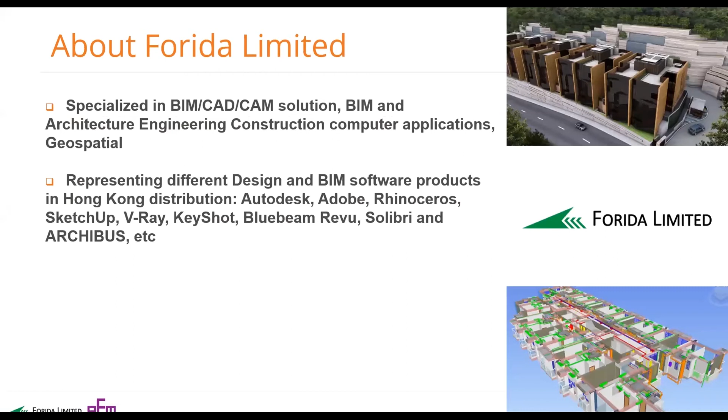And these are the products we carry. We have over 20 products. Feel free to let us know if you want more information on any of it.

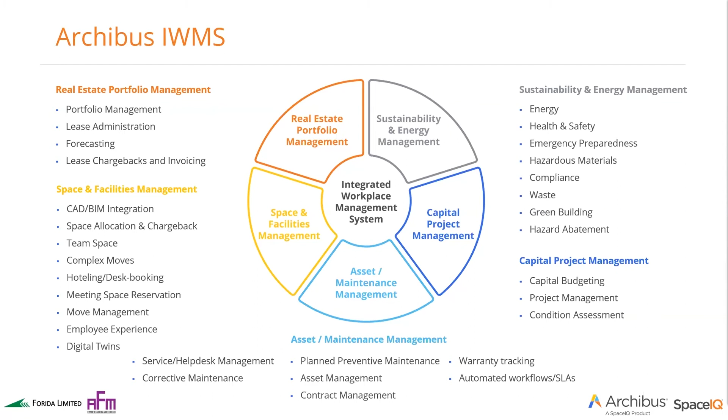So with that in mind, how can you stay up to date? You can use Archibus as a single source of truth. So it's one system that can virtually integrate any of your corporate systems, as you see, like any finance, HR, IT, whatever provider. You can connect and get information that comes from IoT sensors for occupancy, maintenance, whatever you need.

You can get information that comes from your CAD drawings, from your BIM models, information that is leveraged by maps with integration with GIS, Esri and Google, and even getting all your spreadsheets that transfer in and out as you need. It's a straightforward deployment from data entry to business outcomes. It's an open platform with a set of APIs and connectors to integrate with any platform, whether it's a software or a sensor. That is Archibus, the single source of truth.

So far, we have seen that we are with you with a global force all over the world and locally in your region. We have more than 1,000 implementations and clients that have been with us for many years, some for more than 15 years. So it's the right choice, and they keep on using it.

They selected that Archibus suite of products and implemented it module by module, and they keep growing and adding value because of that multitude of capabilities that we have. And these clients use Archibus as a system that centralizes their workplace and facilities data into a system, making their life easier and easier in terms of taking decisions and getting the processes done.

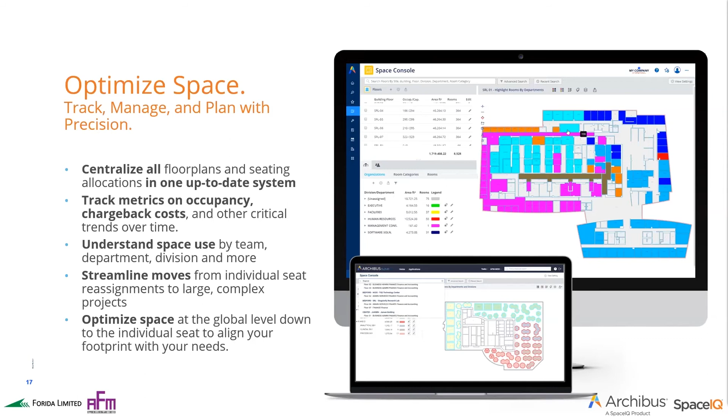In terms of maintenance, get an enhanced response from the field team, because we have a fantastic mobile app for service professionals. With that, you can get your work being requested, as we saw, by the end user, but then being managed on a console for maintenance or on the field service app. And you can track whatever KPIs and outcomes.

And you can, using a planner, reduce the maintenance by emergency or by on-demand. So you can easily get the preventive maintenance planned and implemented in the organization. And with that, standardize any best practices that you need in terms of facilities operations, and avoid any break or replacement of assets that are really costly for our organizations. You can do that with Archibus.

Let's look into the assets. You can get the life cycle optimized for these assets so that they last longer and you can get a better return on your investment. So you can prioritize those assets that are high value because you integrate with the maintenance strategy. You avoid the replacements. You reduce the assets that are underused.

Sometimes we have assets that are either in warehouses or that are not used as much, but because we can build this twin model, this twin approach, to say every information that I have physically, I can have a twin in the digital world. So I have this twin model with Archibus. I can easily detect what assets are not being used, because all the information is available here.

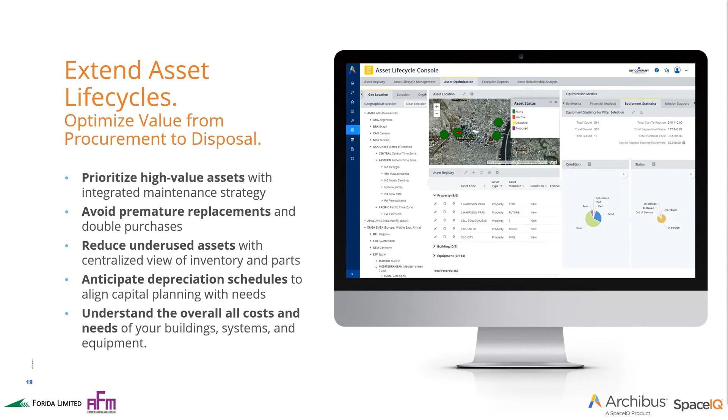And we can get the schedules in order in terms of depreciation, and we can easily understand the condition, the status, and the overall costs and the impact this has on my organization in terms of the life cycle of my assets. The last but not least is how to mitigate risks.

Not only can you deal with health and safety with Archibus, you can be prepared for emergencies, you can deal with hazardous materials and wastes, you can ensure that you are compliant with any legal or standard important for your business, for your day-to-day life in terms of your business.

So with this in mind, we are going now to do a quick Archibus demo. And if you see something that might be interesting to you, please consider that you can request from our partner a more in-depth demo to cover your specific needs.

You will see Archibus in the following layers. So we will see first the front-end interface, the Archibus Workplace for the workplace user. Then we'll see the back-end interface with the home pages, the console approach, and the reporting. If everything is okay, let's dive into the product.

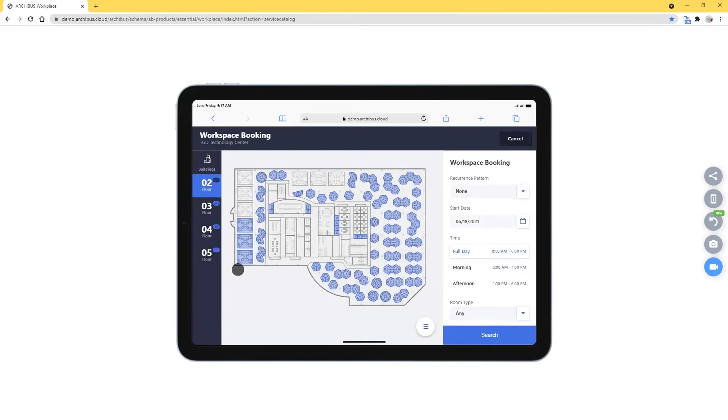So we can also book a workspace. Booking a workspace is something that is really important these days. We can safely book a meeting space, but then I also need to book a space because I'm going to work that day in the office. Right now, with the hybrid approach, Archibus easily lets us say, book the meeting, but now I want to book a work spot to work.

So I can just click on the work spot, click on book. I can book for myself or for another person, for example, a visitor, etc. I can just click for myself and click on book. And by clicking that, it's successfully booked.

So now I go to main. I can see here my reservations, my workspace reservations. When I log in, I can do a quick health check in case my company demands that I ensure I've been vaccinated or that I have my COVID test. There's a health check that I can do.

This could be configured based on the things that you need to do. If I confirm, I can now check in if I'm going to the office. So really, really straightforward, not a lot of clicks. And with that, you can get things done.

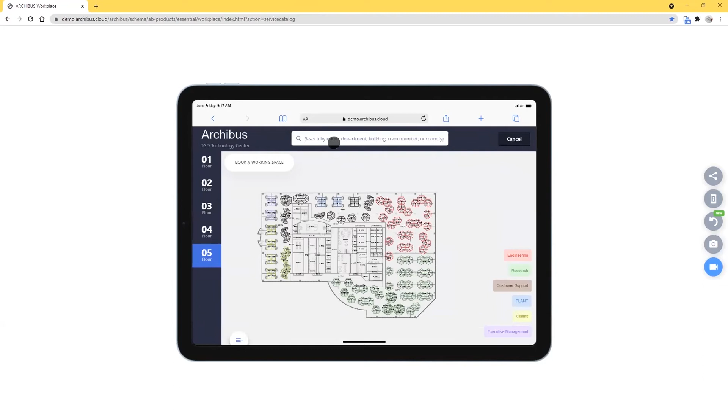You can easily get information about where people are sitting, or find where the closest printer is available. So I can see that, and I can see all that information on the floor.

So not only can I get a self-service environment for the types of maintenance that I need, this is the interface that will work on your employees', your users' mobile devices, and will enable them to get all the information they need, to get the services, the requests, and the information they need for their daily job. This is the Archibus Workplace interface.

Now, as a manager, we got all these requests, and now we need to see the back office. So as a manager or administrator of a certain process, a process manager, I log into Archibus, and with Archibus I'd like to highlight a couple of things here.

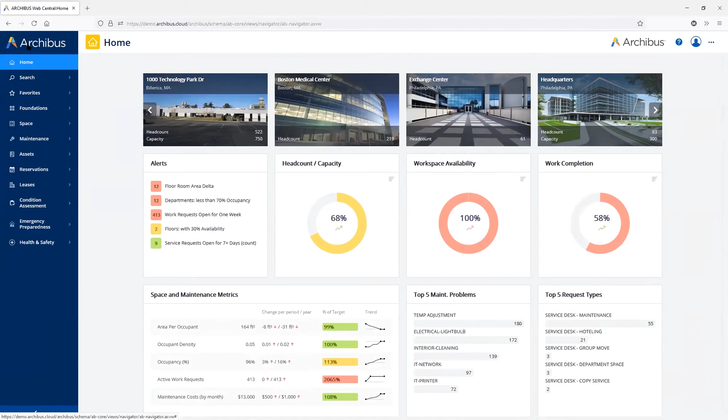First, you have this Archibus homepage approach. There's the menu with all the things - I'm just going to hide this for now. But this homepage is really fantastic because it can be developed for your needs, for your role's needs. It can have a summary of information about your buildings, alerts, any metrics that are important for you. And these homepages can be really adapted and configured to what you need.

I'm going to show you another one. This is what we call the dynamic workplace. On the dynamic workplace, guess what? I have all the alerts for the things that I need to do. I have the dynamic workplace metrics with the metrics that are important for my daily job, any important things I need to track, KPIs that I need to track, and then buckets with just the features that I need to do for my role, for my daily job.

I don't need to go to the menu, they are here. In this demo, in the case of the back to work approach, these are the buckets that ensure that you have everything for your back to work. You can mark employees to return to work, you can get access to the space console that we'll see in a little bit, you can get access to the workplace if you want to request, and you can get some reports in terms of utilization by department, room capacity, etc.

You can manage your maintenance because you probably need to clean, you need to ensure the quality of your space. You can see the assets that you have there. We can manage a condition assessment so that you can see if your facilities are ready with all the things needed for the back to work.

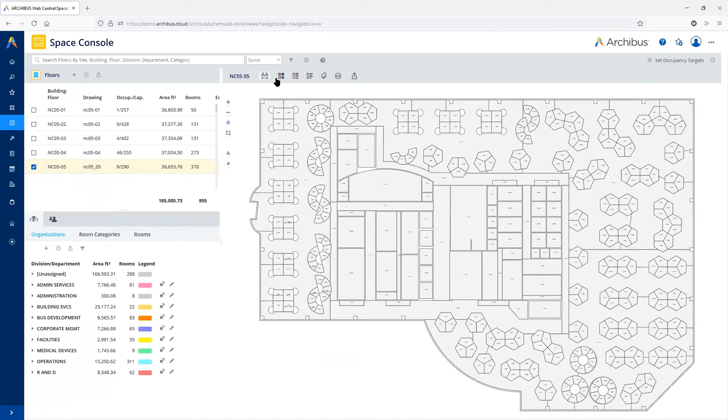And now this information that is here is published from the CAD drawing or the BIM model. And now you can consume that easily here without needing extra licenses from CAD or Revit in this case. And here I can just see, let's see those that are available and hotelable.

And it's highlighting to me the spaces that are available and not hotelable. Why are some of these not available? That is because of the safe distancing rules.

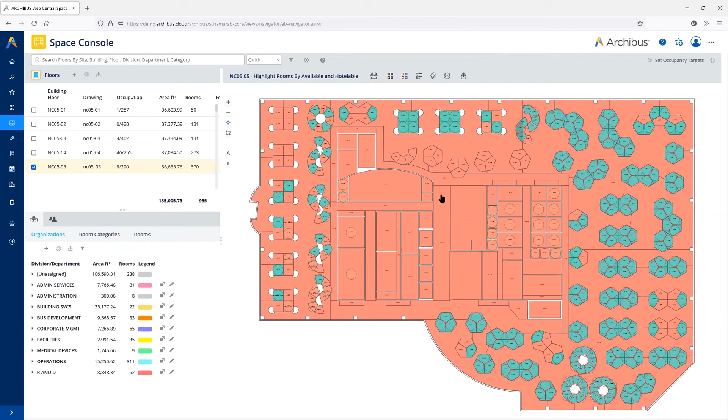And because this is a one-stop shop, I can check my safe distancing on this specific building and floor. So I just click there and I can see these bubbles that tell me if my space is safe to use or not. So for example, these ones here, they are not.

So I'll probably need to just go ahead and select a few, edit those rooms, and just mark those spaces that are not used because of the safe distancing rules. So I just save, and on a quick approach, I quickly declare that this space cannot be used because it's not respecting the safe distancing.

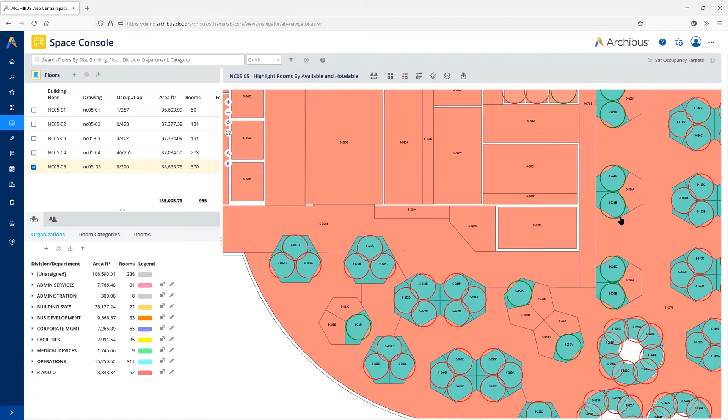And now I can ask someone to go there and, for example, put a sticker, and the other spaces can be used because they have the proper distancing available. But in case the distancing changes, again, easy - you can go to set occupancy distance targets, and you can do it per building.

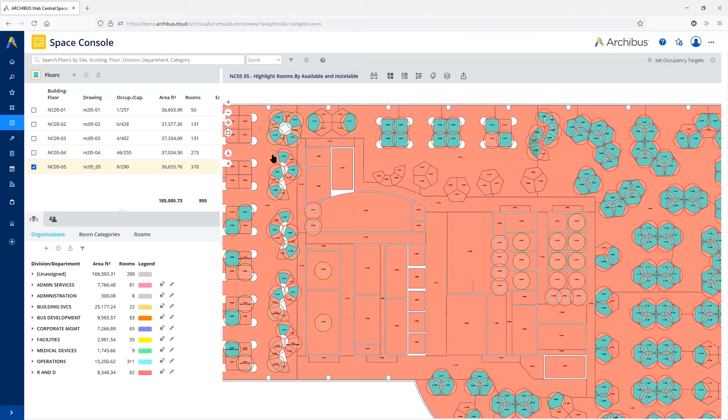Let's see for the building we were looking into. Let's edit this building. And here I can define what is my occupancy target and what is my safe target in terms of area. So I can say 4. And if I say 4, imagine that the regulation changed and you want to be compliant, but you see that now, because the bubbles are bigger due to the mandate, these spaces are no longer safe and compliant.

So you need to change that. It's just an easy way for you to adapt your floor plan, and with that, be sure that you have everything in place so you can manage the space. You can manage also the assignment of people into those spaces.

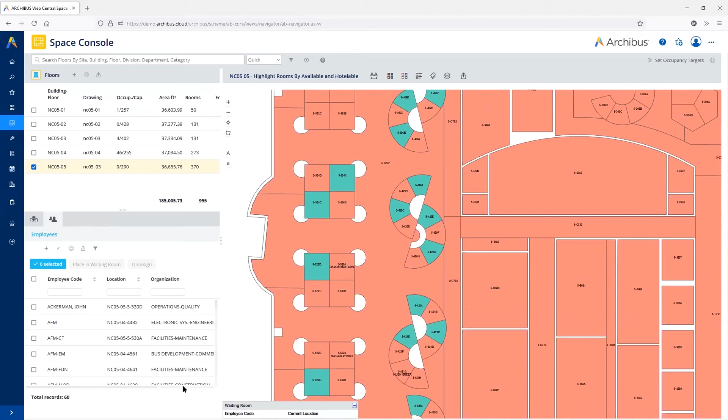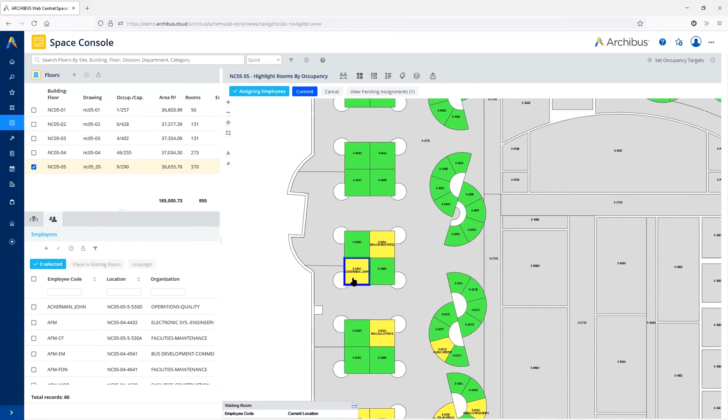For example, let's look into the occupancy. I'm seeing this spot is occupied, but I can move John Ackerman and place him in a waiting room. I can easily move him here and say, this is where you're going to work. So we can easily drag and drop and assign the occupancy or personal occupancy to your floor plan with no problem.

This is just to show you that you can have a central location to manage everything related to space. For example, if you want to manage maintenance, it's the same thing. I can go to the menu, click on maintenance. There are some shortcuts here for the things you need to do, and I have the same approach for maintenance. So all my maintenance and services that I need to tackle are available here, and I can get all the information that I need in one single location.

So we have this console approach so that you can manage on the back office whatever you need. It's easy to get to any view from the many views, the many reports, or you can just go to the Report Central, which is the last one I wanted to show you, and generate any report you want from here, if any of the more than 1,000 out-of-the-box reports available are not enough for what you need.

So we saw on this demo that you can—let me get back to the PowerPoint. Very well.

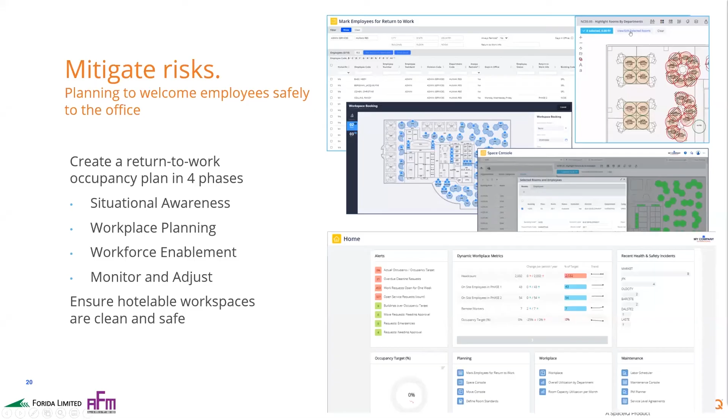We saw on this demo that you can have a fantastic user interface for the end users, with great home pages with the detail that you need, the metrics and the actions you need for your daily job. We saw that we have this console approach that focuses your job on what you need to do for that specific role.

With that in mind, that you can get what you need out of the system, do you feel this solution could be useful for your organization? Take that in mind, leave us a note, raise your hand, drop us a line on the chat. And with that, let me keep going.

The best-in-class commercial off-the-shelf functionalities—we are always at the latest release with Archibus. The pricing is based on the area being managed and the modules being used.

Regarding other services, they are delivered on a shared service approach by the business partner that you select and the SpaceIQ team. This is the base of the product. We always want our clients to be up to the latest to get the best results out of our solutions.

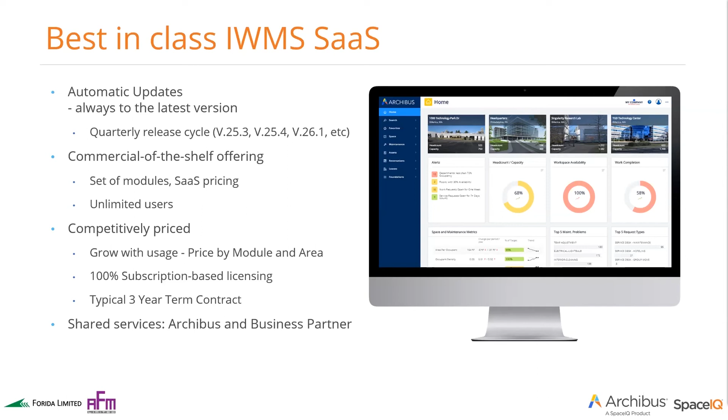Archibus SaaS is composed of modules. The base module is called Foundations, and it comes with smart client extensions—mainly the integration with CAD and Revit, and also the ability to do bulk load update of data. We have the metrics framework, a really powerful framework that enables all those metrics you see on the home pages. It also comes with the mobile framework so you can enable your team with mobile access, and it comes with unlimited users. Can you imagine?

But keep in mind that normally Archibus solves the majority of your IWMS needs, your system needs, and we allow a great level of configuration. As we showed, you can develop reports via Report Central. You can add even custom fields, etc.

As seen before, you can virtually connect any of your corporate systems or other sources of data with Archibus, and vice versa. You do that by enabling either the Archibus connectors, which enable you to do flat file connections, database connections, whatever, or you can use our available REST API with web services that enable you to connect with not only data, but also workflows.

In terms of hosting and security, we have our SaaS solution hosted with Amazon Web Services, and with that we carry all the certifications of that infrastructure. Clients can choose where it should be hosted by selecting the Amazon region. We have leveraged the infrastructure from Amazon that has regions all over the world.

In terms of information security policies, SpaceIQ is really committed to safeguarding your data. In order to do that, the company Information Security and Privacy Manager developed what we call the Information Security Program document, which we call the Information Security Policy. This document covers anything related to our compliance with security standards and data protection standards. We are compliant.